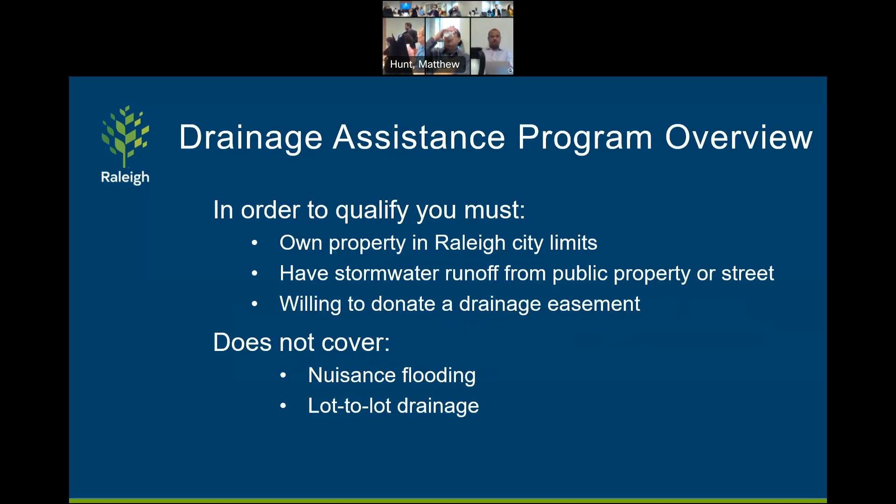On previous presentations, there was an extra bullet that would be here. It said you would have to pay the stormwater utility fee. Now that the policies have passed through council last month, that is no longer the case, so that has been removed. And the drainage assistance program does not cover nuisance flooding or lot-to-lot drainage.

So an overview of the program, we have $1.25 million in annual funding that is allotted. That doesn't mean that those funds will necessarily be spent this fiscal year. Oftentimes they're spent in future fiscal years. With that, 8 projects will be funded per year, and funding is based on the ranking. Now, keep in mind that projects can move up or down depending on how projects come in, if they're ahead of them or behind them.

So we have 2 projects. We have Mourning Dove Drive, which is the second one I'll talk about, a little bit east of Six Forks and south of 540. And then we have Bayfield Drive, which will be the first project I'll talk about. That's a little bit off Western Boulevard as you head towards Cary.

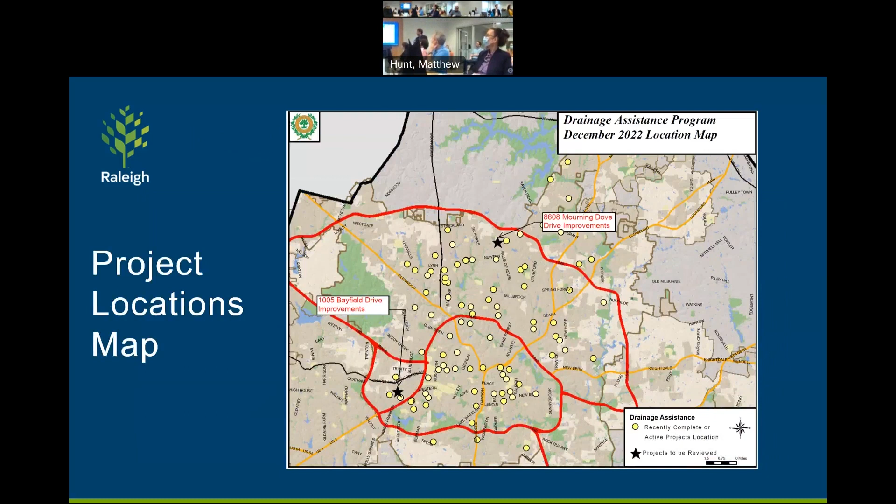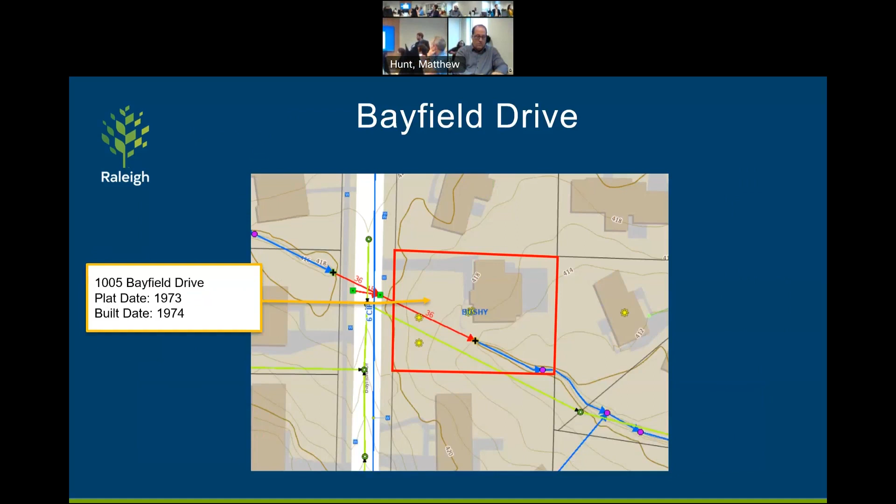So Bayfield Drive is a single lot platted 1973, built in 1974. I will give credit to the resident on this one. She has been very, very patient. This was actually the 6th project that we scored. So she has been waiting for over 6 years. And so again, credit to her for being patient and waiting through this program.

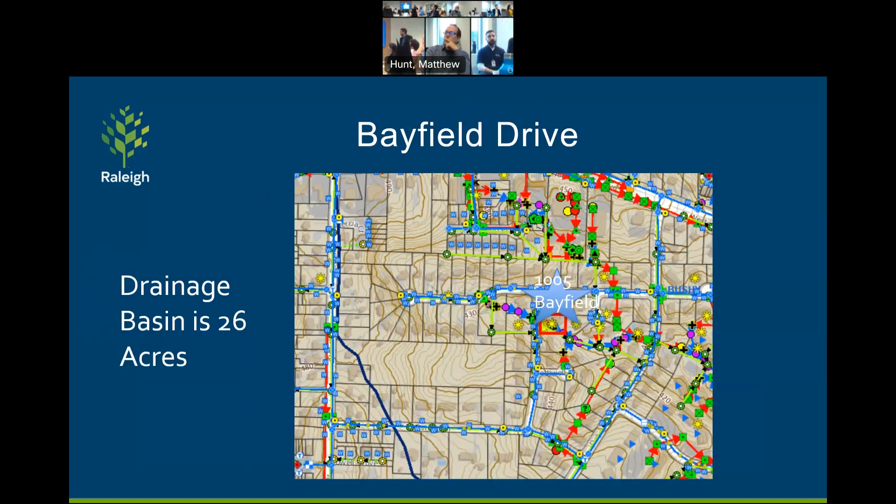Just zooming out, right here we have Western Boulevard. We have Bayfield Drive right here, and the drainage basin is 26 acres. And as you can see, there's some sinkholes all along the route of the pipe. It's within about 20 feet of the structure. The picture on the left is looking downstream. The picture on the right is looking upstream. You can see they're fairly sizable holes. She's had to cover up her property because it's a hazard, and we're trying to help mitigate that.

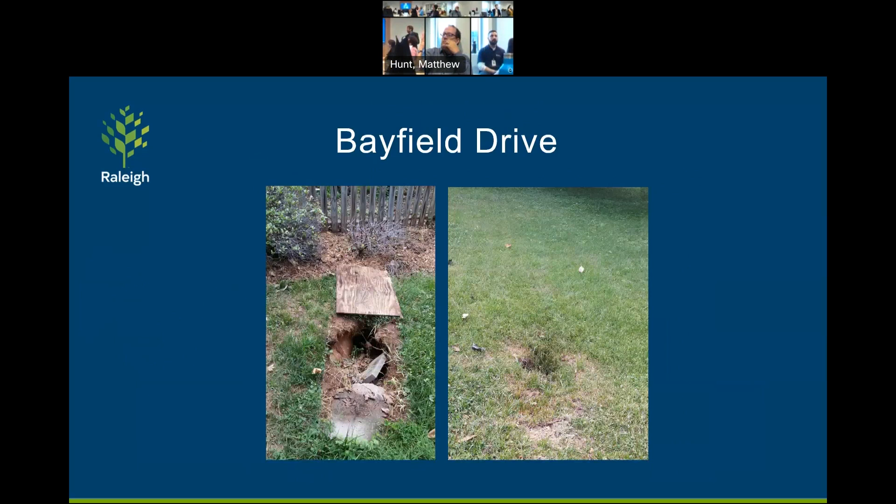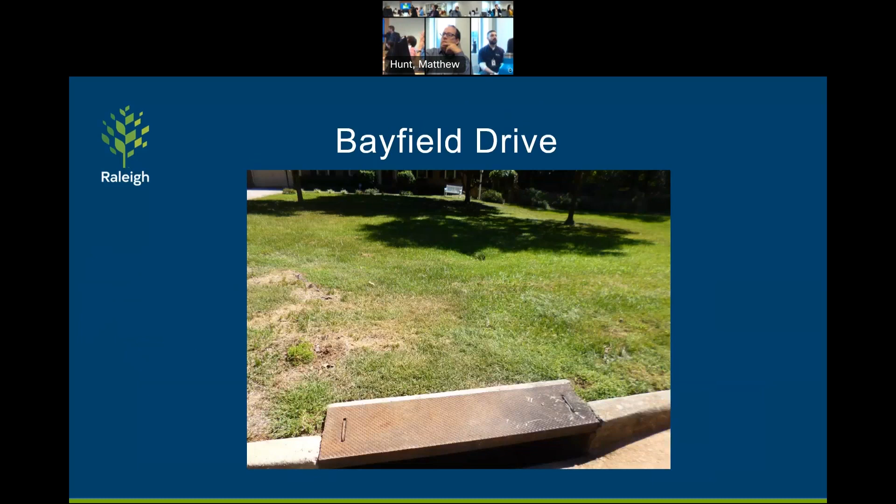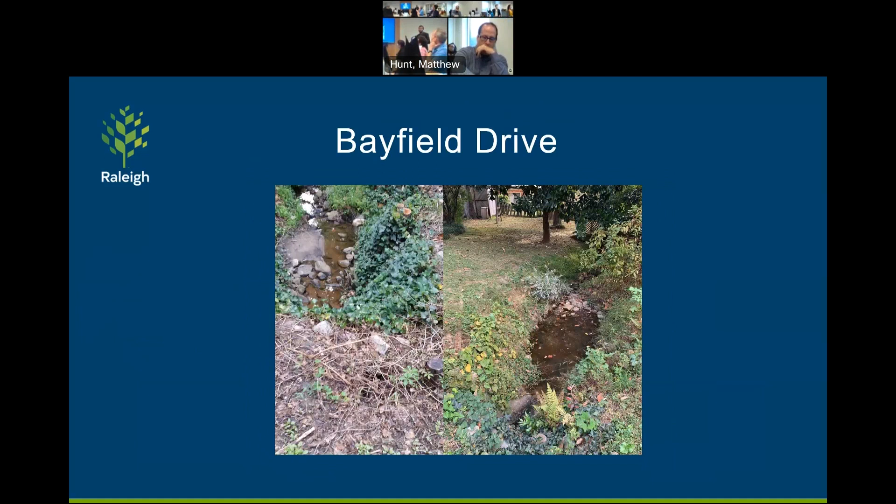This is looking down towards the house from the street. Again, you can see a hole right in this area in the middle of the screen. Towards the end, the pipe will daylight. You can see there's a little bit of erosion going on. Not exactly threatening the structure, but while we're out there, we'd like to mitigate some of the risk and do some outlet protection.

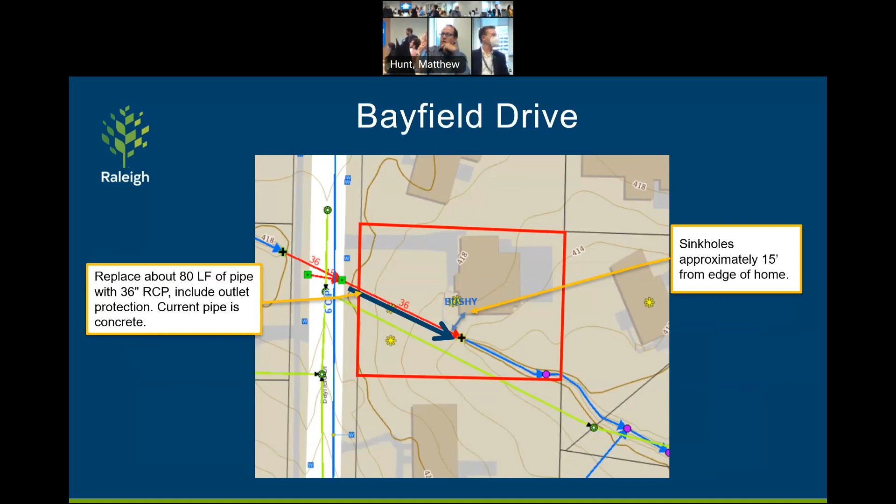And so the plan for this is replace about 80 linear feet of pipe with RCP, include some outlet protection. And we did look at perhaps lining, given the video and condition of the pipe. Don't think that's going to be an option. So we'd like to go ahead with a dig and replace of the pipe.

And the scoring, one of the things we're doing now is we're looking at past projects. I used the Bramblewood project, which I'm sure you guys remember from last month or 2 months ago. You can see the scorings are fairly close to each other, which shows the consistency of our evaluation system. So that's very good. If you recall, there were sinkholes and replacing a portion of the pipe about the same distance, and again, these scores are very close to each other.

And costs. Looking at how we arrived at the cost of $102,000. We've had several submittals regarding Western North Ridge where the contractors submitted their proposals. And what we did was we took those numbers and applied it to this project. So we're using a little bit more accurate, more recent numbers. So with that, looking at those totals, we had the 4 contractors.

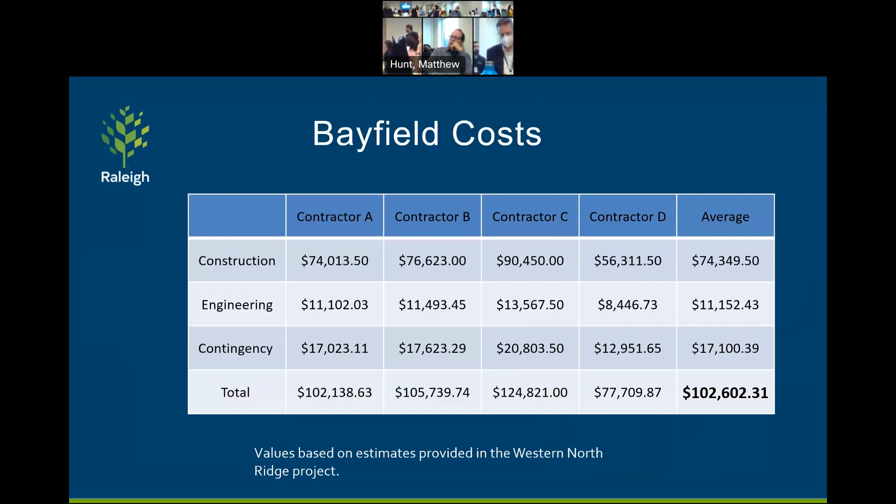So what you're seeing here is an average of the construction costs, the engineering, the contingency, which I assume would be 20%, and then the total cost. Again, this is all on average, but these are all estimates. Costs can vary as we get into the project. So we assumed about $74,000 for construction, engineering 11,000, contingency of 17,000, and total cost of 103,000. So with that, I'll stop and pause for questions, recommendations, comments.

We're good. Do you want to approve this or do you want to wait until the second? Let's see the second one. Yeah, do it in one.

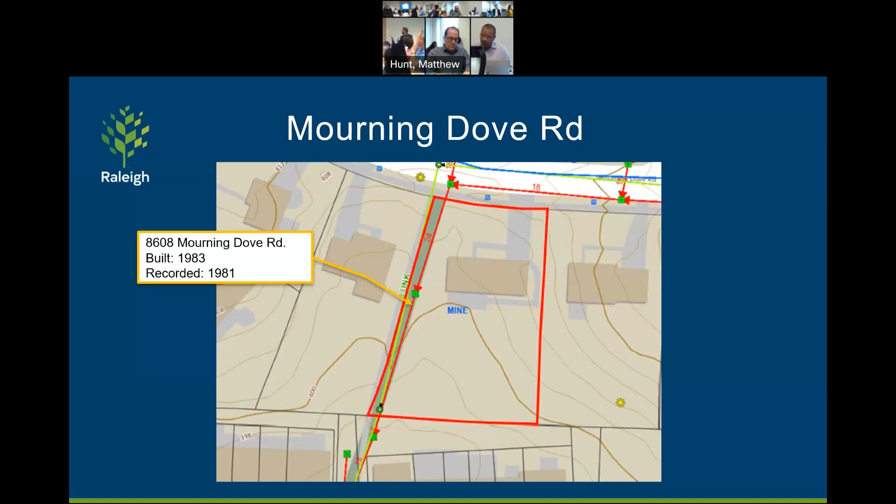So this is actually a fairly similar project. Single property. We have a couple of sinkholes that you'll see in the next slide. So again, this is just south of West Millbrook Middle School. And I'll actually get into that just a little bit because one of the things you'll notice is that the pipe compared to the previous project is smaller.

So we had a 36-inch pipe on the last project. We had 24-inch pipe on this project. But the West Millbrook School development did put in detention for the 100-year storm. So that's why I believe we're not seeing any structural flooding issues at this moment. So we're just seeing sinkholes.

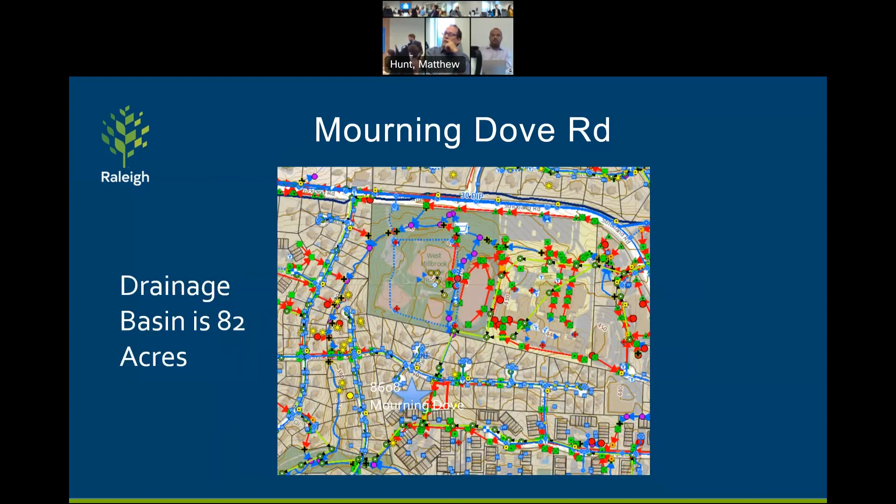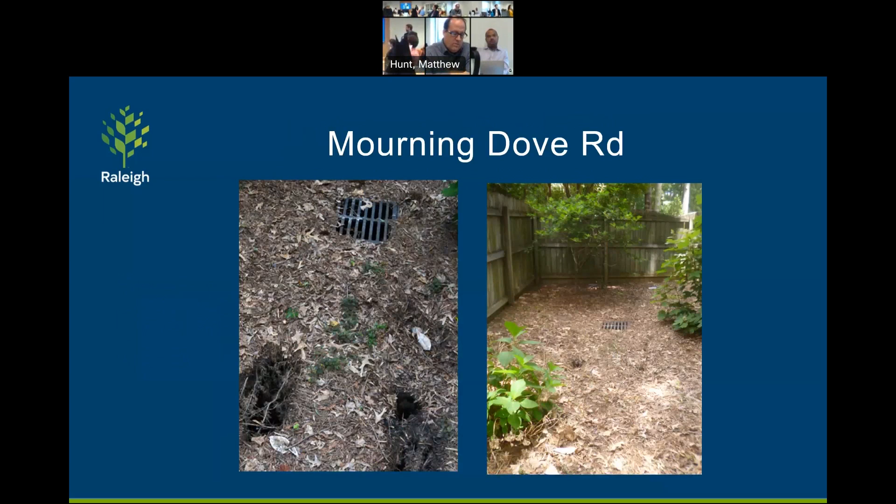So I've got two slides here. This picture was from 2017. This is the inlet or the catch basin on the westernmost portion of the project. That was from 2017. This is 2020. So you can see the difference in how it's grown.

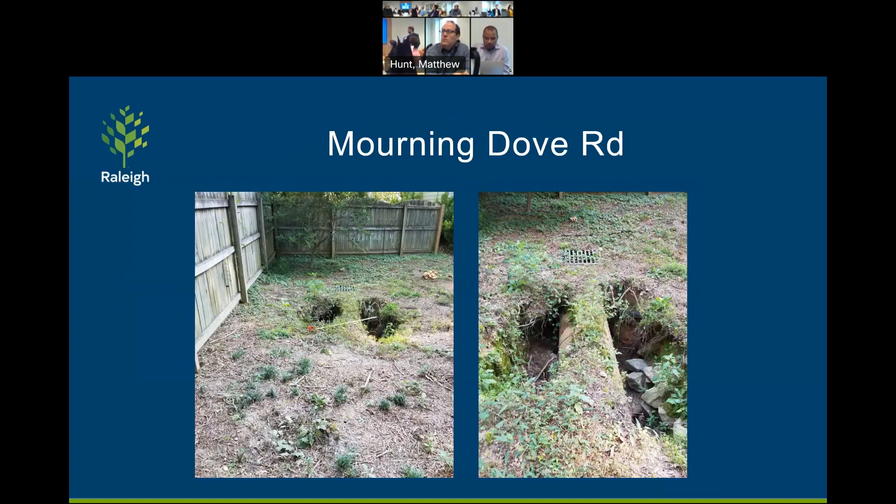We think that the best option for this one, again, is dig and replace. We would install an outlet right here at the property line, even though the line does go a little bit south. These property owners to the south have been amenable. They've been open to projects, but they have not signed our request form. So we've just stopped short of the property line. Again, the majority of this action is going on near the blue line.

Comparing scoring, again, going back to Bramblewood, very similar to each other. I'm sure if I added a third column with Bayfield, they would be quite similar as well. But again, it shows you the consistency of the scoring. So I'm very impressed with the team and their consistent scoring as well.

Looking at the cost, again, same metric. Looking at Western North Ridge, average cost for construction $87,000, engineering $13,000, contingency $20,000, total cost $121,000. You'll notice this is about $20,000 more than the previous project. There's sewer line in the area, so I accounted for that extra work navigating around the sewer line, which is a little bit longer. Also adding a catch basin.

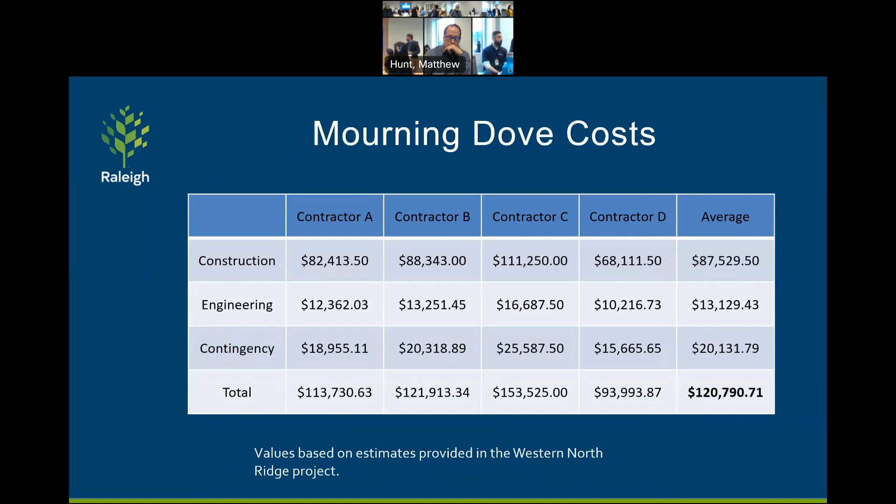So total project costs, we're estimating Bayfield 103,000, Mourning Dove 121,000, total 224,000, which would leave us 718,000 left. With that, I'll stop for questions, comments. The contractors, A, B, C, D, are they the same for both? Yes. Okay. All right.

And just in general for everyone, in terms of these diagrams, the red lines are always closed conduit, underground pipes. The blue lines are always open channel pipes. The green lines are sanitary sewer pipes. That's the schematic that we use, consistent with IMAPS. So that same legend is used to help you get your bearings. And I probably confused things by adding a blue line here. I thought of yellow, but that's yellow and that's orange, so. That's fair. It was a quick slide. Thank you for clarifying, both of you.

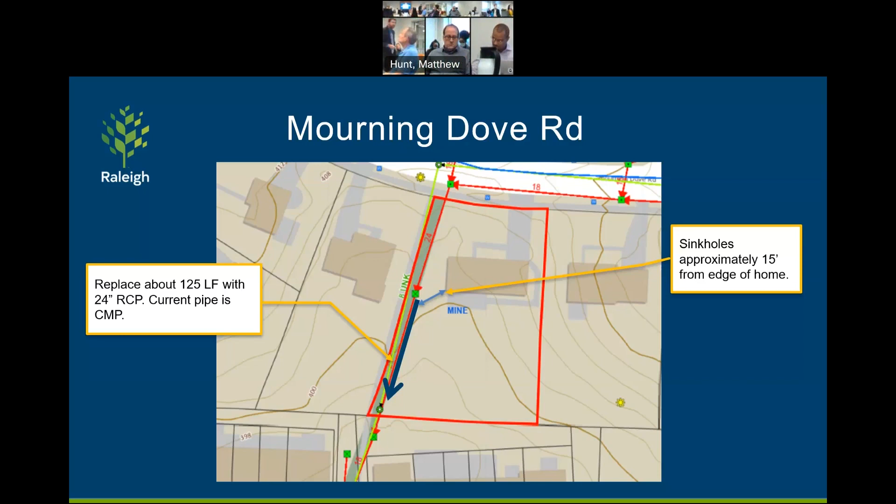Barbara? Around to the other side.

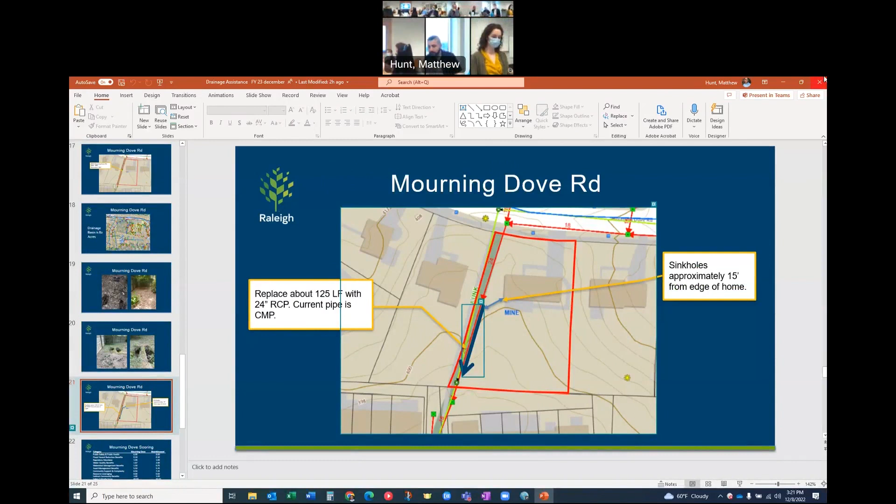Hi. Well, thank you, everybody. We're really pleased to have this opportunity to get some feedback on our public engagement plan for the Pigeon House watershed. When we last met in October, we did an overview of the watershed planning program, if you recall. We touched on public engagement, H&H modeling, water quality modeling, asset management, all the stuff that we do in watershed planning. And this presentation is a deep dive into public engagement. We'd really like your feedback.

And I'd like to give a shout out to Ellen Colon, who's here from our Office of Community Engagement. Thank you very much for coming. Ellen has been graciously reviewing our plan. She came to our first Pigeon House meeting and she's here to hear your feedback firsthand. So Ellen's the expert and we're just up here presenting. So please don't hold back on feedback. That's why we're here. Thank you.

All right, so the Pigeon House Branch watershed is located right in downtown Raleigh. We have Oberlin Road, the boundary on the western side. Whitaker Mill Road is the boundary in the north. And Hillsborough Street's the boundary on the southern side, with the Capital Boulevard corridor going through the basin. So do we have any SMAC members who live in Pigeon House? All right, we have our stakeholder.

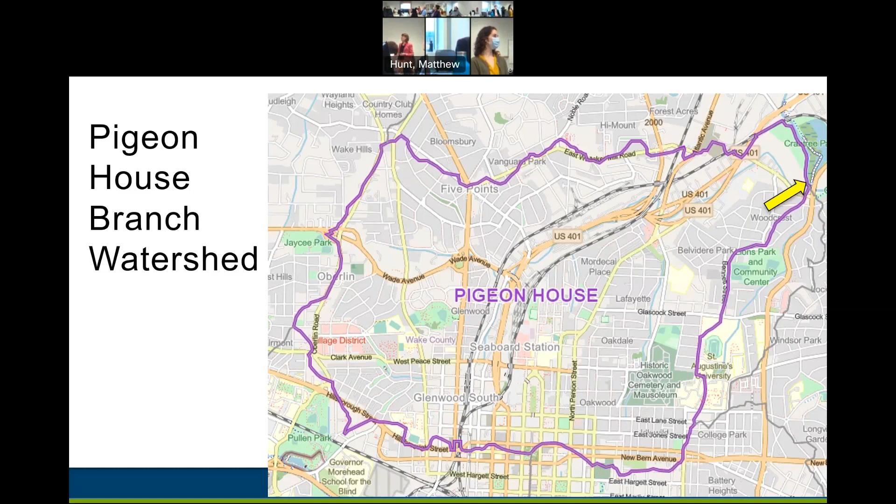All right, and last time we talked a little bit about why public engagement is so important for watershed planning. We talked about how we're using these plans to figure out where to invest millions of capital dollars. We want to hear from the community on what their stormwater issues are and what's important to them.

Last time we did touch on the critical success factors for our watershed planning program. So we said, if we do these things, our plans will be successful. And we had a success factor to build trust with the community through equitable engagement, awareness, and education. And if we can do that well, we will better accomplish that first factor, which was to understand the level of service needs and expectations of the community.

All right, so we have the public engagement plan in your packet, and we will go through all the components of the plan. Like I said, we did ask for feedback from Ellen and from the Department of Equity and Inclusion. So they gave us some valuable feedback on messaging and things like bring the meeting to the people instead of the other way around. So we were happy to hear that and are looking forward to incorporating that. We're still in the early stages of that public engagement.

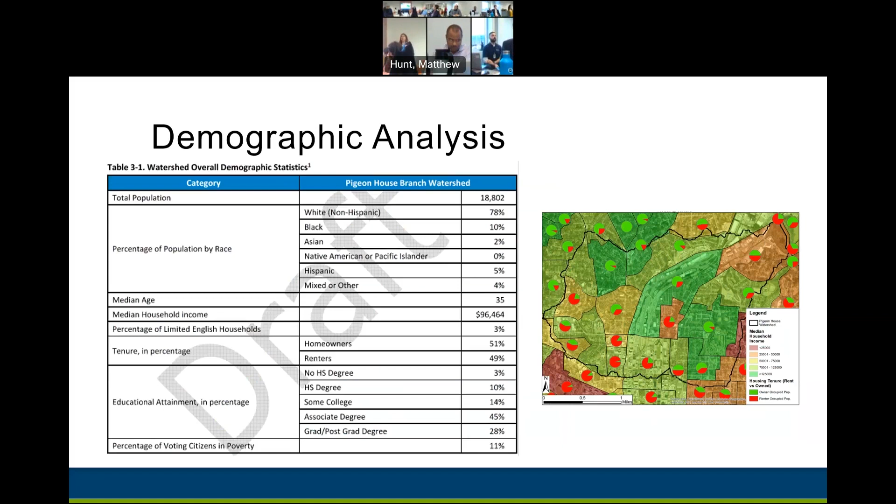So the map here, you can kind of see the outline of Pigeon House. These are all the census block groups within Pigeon House. So this data, we've broken these categories down into the block groups. So this data will help us understand more about where and how to target our engagement with different populations.

Involve and collaborate, those allow stakeholders more say in the decision-making process. And then empower is basically delegating the final decision to the stakeholders.

So here we're in our early stages of the watershed study, and our main stakeholders that we're dealing with right now are the general public and community groups, and the level at which we're engaging them is inform and consult. As we develop projects out of the watershed studies, we may involve those groups more. We may be doing some collaboration later in the project or in later phases as we develop projects with city agencies and government agencies.

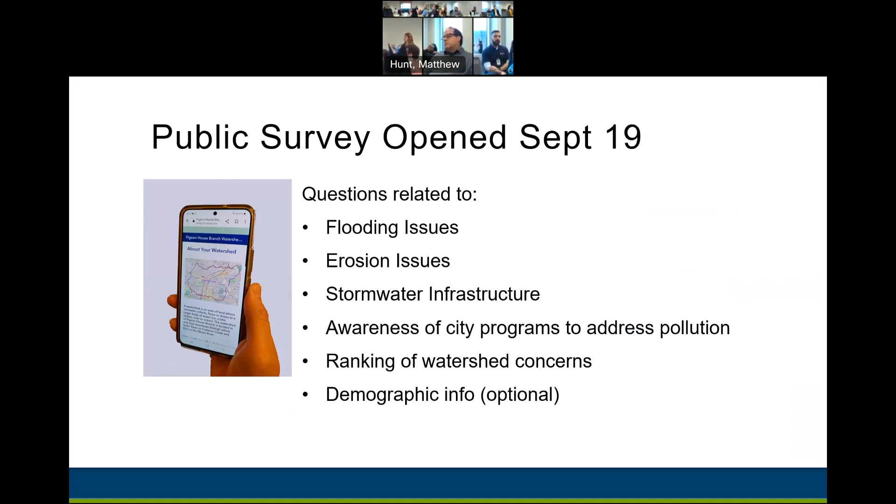So since this watershed study, as Barbara mentioned, is going to be determining our priorities of where we put our capital funds in this watershed, it's important for us to hear back from the community in the watershed about issues and opportunities for improvement. So we've asked questions related to flooding, erosion, infrastructure, pollution, and we also asked some demographic information, which I'll talk a little bit about later.

And then we had our public meeting. That was in early November, and we held this at the Halifax Community Center, which is located pretty much smack dab right in the middle of Pigeon House Branch watershed.

And that was from 4 to 7 in the evening. And in keeping with our big goals to promote stormwater programs and stormwater messages, we are setting these meetings up as kind of a drop-in open house style. So we have a number of tables here representing different stormwater programs. So at Watershed Planning, folks could learn about the study. We had lots of big poster maps and also some computer screens where we could zoom in and talk with folks about specific issues in the watershed.

We had a stormwater maintenance table where we even brought in a pole camera to show folks how we do stormwater inspections. The drainage assistance and stream stabilization teams, Chaz and Dominic, were represented. They had a table there. Raleigh Rainwater Rewards, we had a really nice poster showing the location of all of those projects. And there have been 49 of them approved in Pigeon House of all different types. So it's a good example for folks to learn about that program. Also highlighted volunteer opportunities and our green stormwater infrastructure initiatives.

So we had in total about 15 staff at this meeting, as well as a few staff from our consultant that's helping us with this study. So it was a really good opportunity to get a lot of engagement with the folks that came to the meeting. A lot of one-on-one time.

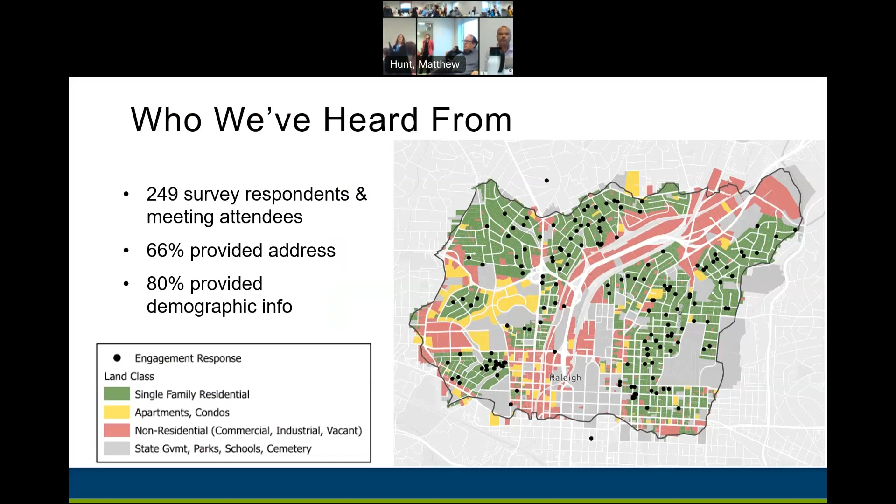So if you see the black dots, we've got a good geographic spread of responses across the single family residential community. Where we've gotten a little less engagement is with the apartments and condos. So that's the yellow areas. Traditionally, those have been difficult for us to reach. We don't have their contact information through our billing database like we do with some of the single family residents. So that's something we've been talking with housing and neighborhoods, community engagement, trying to get some ideas about how to really reach out to the demographics that we're missing and the areas that we're missing.

For housing tenure, the watershed is almost 50-50 homeowners and renters. But we're seeing most of our response coming from those homeowners. So I think that corresponds pretty well with what we've seen on the previous slide, where we're missing some of those apartments and condos. So that's an area where we'll be focusing outreach.

Okay, so that was kind of who we heard from. We'll talk about what we've heard. We had a ranked choice question on the survey that said, please rank your concerns in the watershed. So the highest ranking was street flooding, followed pretty closely by pollution. Yard and home flooding and aging infrastructure and erosion followed that in order.

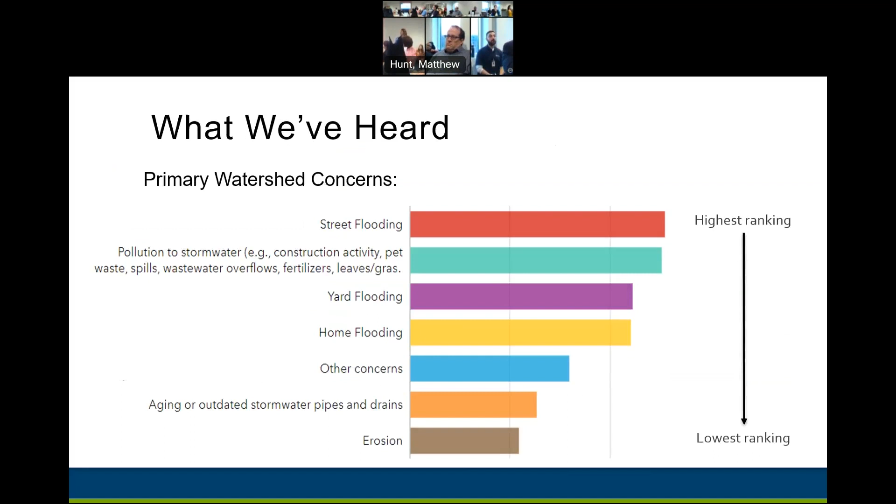And this is important information for us as we move forward, knowing where to target our modeling in the next phase of the watershed study, and also helping us to verify those models to particular storms. So, in most cases, folks provided their information. We can follow up if we need more information about their particular flooding issues.

Did I get out of that?

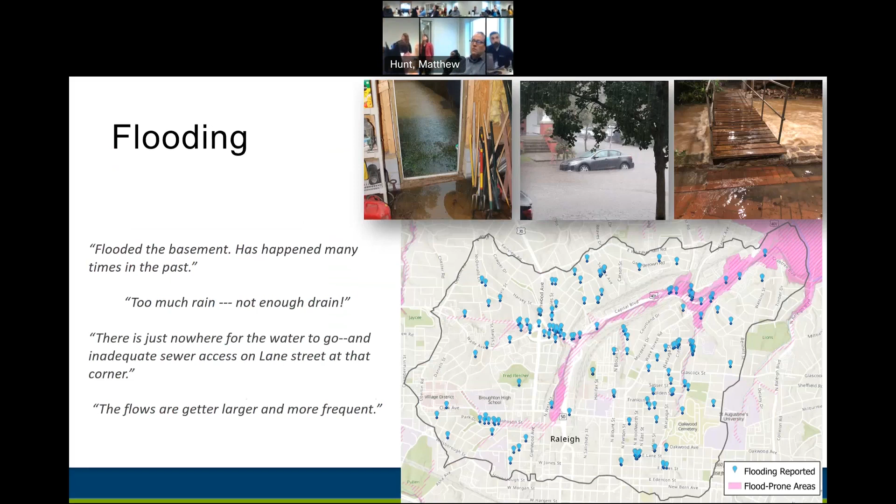Okay, so the second highest ranked issue that we saw was pollution. And the question we asked here was phrased to gauge and promote awareness of the existing programs that the city has aimed at pollution prevention. So we said, please, if you are aware of any of these programs, please check.

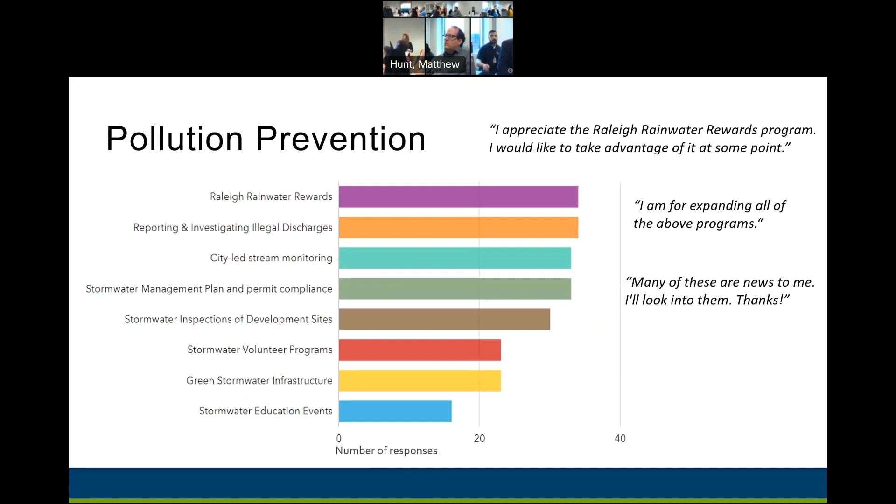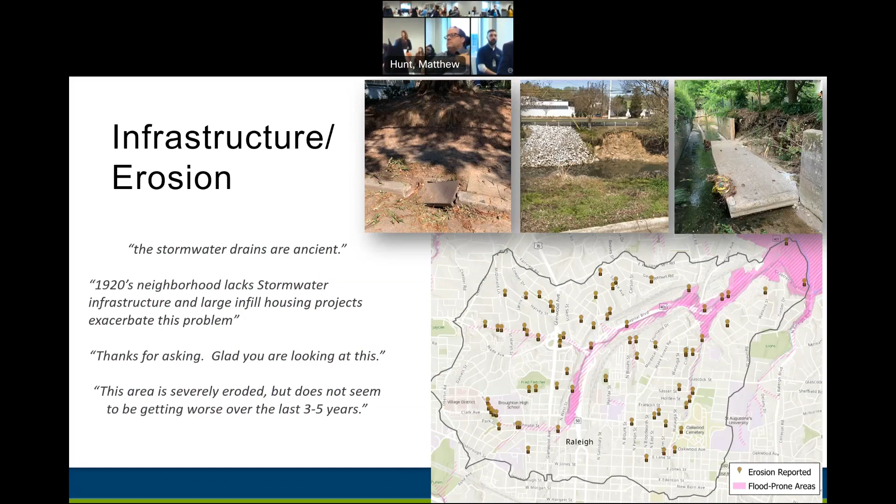All right, so that kind of gives you a quick overview summary of where we're at to date. This is certainly not where we stop. It's where we will be continuing. We're in this first phase of the project, and engagement's going to continue throughout the project. So some of our future things to look at here: efforts to target some of those demographics that we haven't gotten as good a response from. Again, working with housing and neighborhoods, community engagement, folks like Ellen to help us with that.

And we plan on having at least one more public meeting for information gathering purposes. That would probably be early in the new year to try and get a wider audience of that group. We'll have at least 2 more public meetings during the future phases of the project, one after we have some initial results, and one as we're kind of wrapping up the project. And ongoing education. So this ties in with our goals to promote stormwater programs and to promote stewardship of the watershed.

And then last, I wanted to mention, we'll be coordinating with a separate stormwater project that's just kicking off and looking to address the total maximum daily load in Pigeon House Branch. And the proposal there is to develop a watershed action plan. So there will be lots of community engagement involved with that, and that'll span over the long term. So that'll continue after our watershed study's done. So we're going to be coordinating with that effort as well.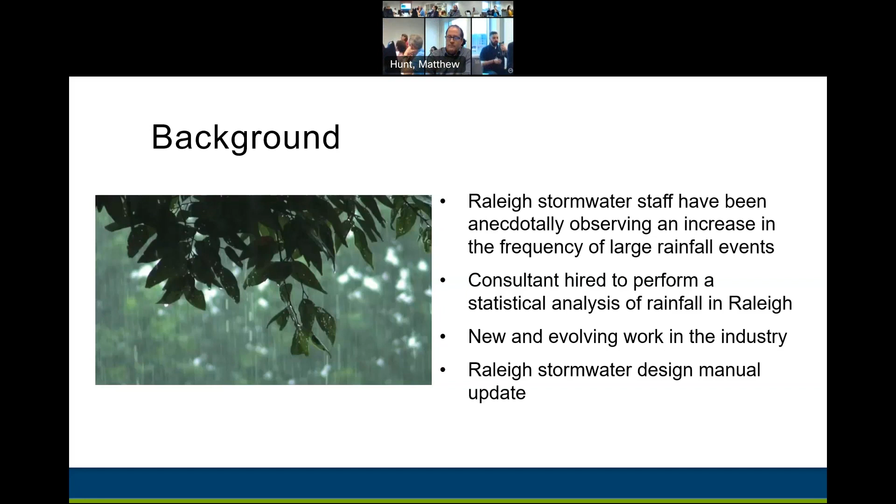So next background slide, just want to spend a minute talking about what is currently in the stormwater design manual. And Sally's here to keep me on track. So the design manual has precipitation frequency estimates that were developed in 2002 based on the available technical resources at the time with input from Dr. Malcom at NC State. And the technical resources available at the time were Hydro 35 and TP 40, so older rain atlases developed in the 60s and 70s.

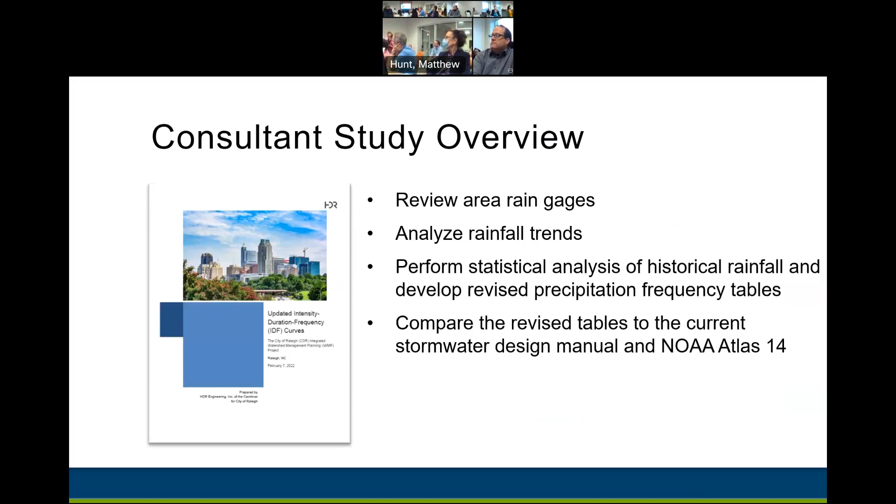All right, so brief agenda, we're going to give an overview of the consultant study and the results. We'll talk about some of the ongoing related work in the industry, and then Sally's going to talk about the impact of all that on the design manual. Okay, so we started this study in 2021, and it was a high-level study with 4 main tasks. Review of the area rainfall gauges, then looking at trends in that data, then performing a statistical analysis of historical rainfall, and developing a revised set of tables. And then we compared these tables from the study back to the design manual and back to NOAA Atlas 14 to see what the impact was.

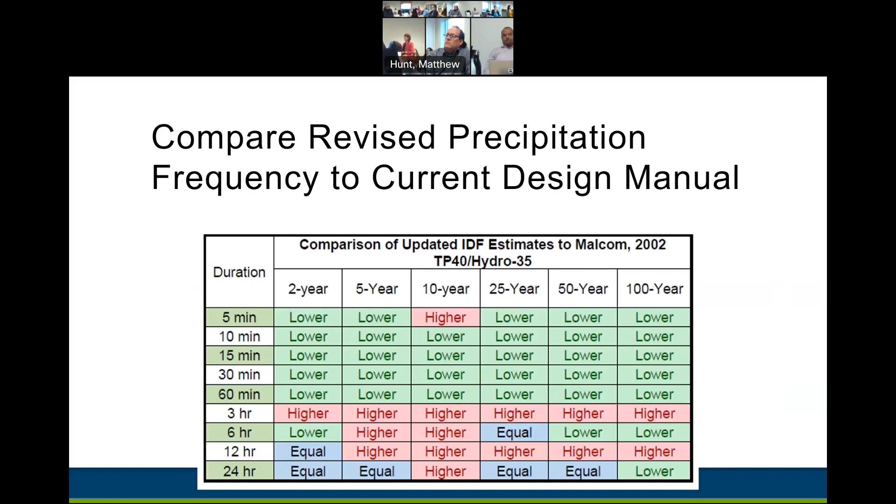All right, so that was this high-level study that we did with these results. And now we can talk a little bit about what's going on in the industry. And then Sally will conclude with what's going to happen in the design manual. All right, so there will be a NOAA Atlas 14 update.

This study was not completely funded at the time when we had our consultant study going on, but now it's completely funded and moving ahead. And they will be updating the precipitation frequency estimates for the mid-Atlantic states. And their prediction is that with the increase in number of stations and the length of record available, this will have a considerable impact on the frequency estimates. So this study is funded by the states, the Departments of Transportation in the states.

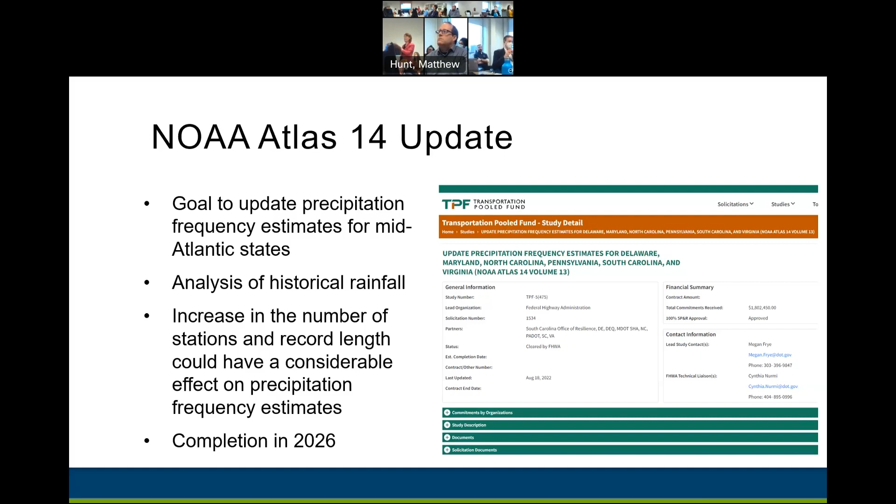That's one. And then there's the NOAA Atlas 15 update. This study was funded by a congressional bill that passed in May of this year, and it is a precipitation frequency analysis for the entire US. They're thinking it's going to be published in 2 volumes. The first volume would look at historical trends and observations, and the second volume would look at future climate projections.

So what kind of safety factors could you apply to that first volume to account for climate change in the future? I don't have a completion date for this one yet. They're currently soliciting comments on the approach. So you may be wondering, how can you have a NOAA Atlas 14 update going on at the same time as the NOAA Atlas 15 update? That's a good question. I think a lot of people have that same question.

But there's a lot going on in the industry. There's a lot of research. For example, NOAA has a project with University of Illinois and University of Wisconsin-Madison to do the research for NOAA Atlas 15. There's a project locally with NC Department of Transportation and NC State looking at future design storms. Arizona State University has another project looking at safety factors similar to what Chaz looked at in his analysis.

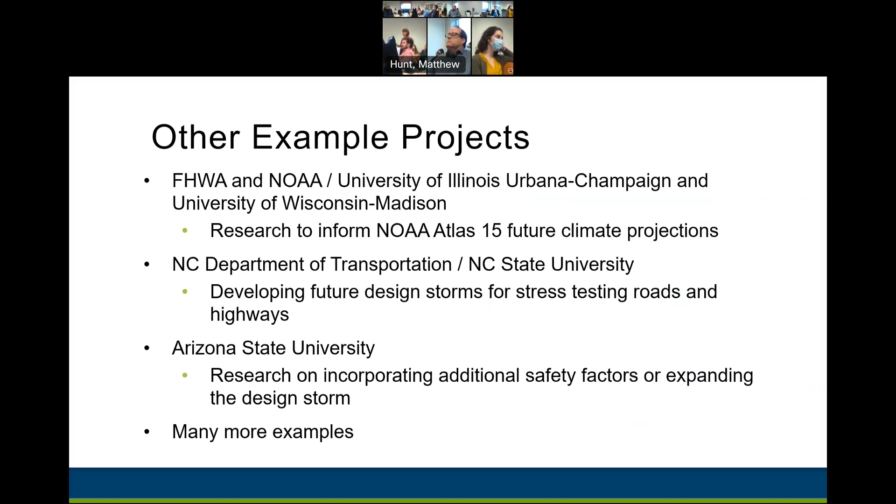And there's a lot more examples. Charlotte Water, I know, is partnering with Colorado State University and doing some research in this area. So there's a lot going on. The question is, well, what does this mean for the design manual? Yeah, thanks, Barbara.

We want this design manual update to last a long time. So we are not going to put hard numbers for rainfall into the design manual itself, because it's adopted by reference into the UDO, so it has to be approved by city council. That's a lot of steps to go through to make any changes. So what we are proposing to do is to reference a document on our website that will say, as of this date, we use this rainfall method or resource.

We haven't made a decision about the initial rainfall rates. Currently, we see most people using Atlas 14. We could require the existing design manual table. I will say, Atlas 14 has a lot more heft behind it in terms of peer review and being established in the water resources industry.

I wanted to mention there are several ways that people are accounting for changing rainfall rates. One of those is updating the rainfall rates. Another way is to up the design storm that you require things to be designed for. And that's something that we are doing with this revision to the design manual, for inlet design and gutter spread calculations. So basically how much water can sit on the road and how fast water has to get into the inlets.

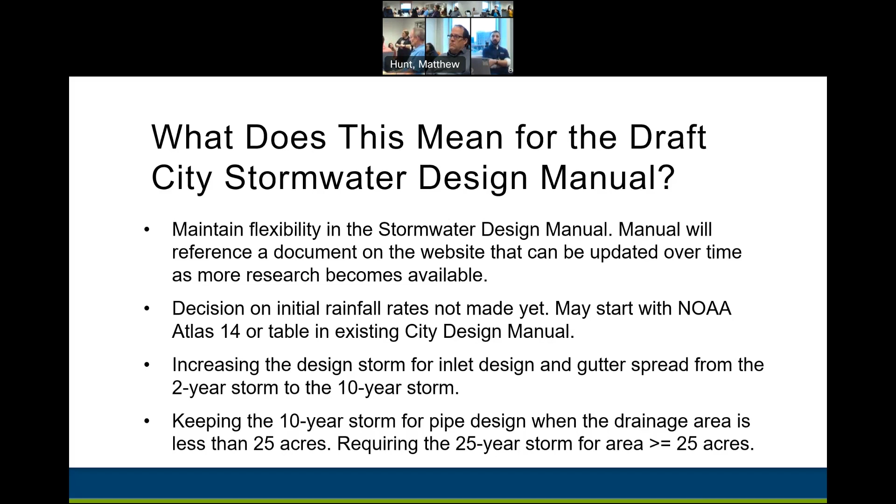Any other questions? Feedback? How will you get the updated rainfall chart that you're gonna use? Do you have to get city council to approve that? No, my understanding is we can incorporate it by reference. We can refer to outside technical resources. But you could change that without having to go through council? That's our understanding.

I just want to say I commend it. I appreciate especially the upping of design standards going forward. We can chase the rainfall, but we can get the results quickly with the standard increase. So I appreciate that.

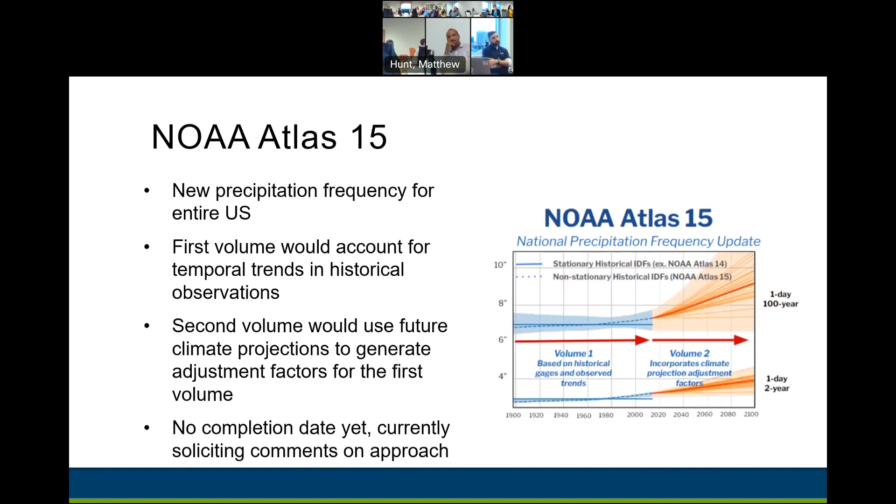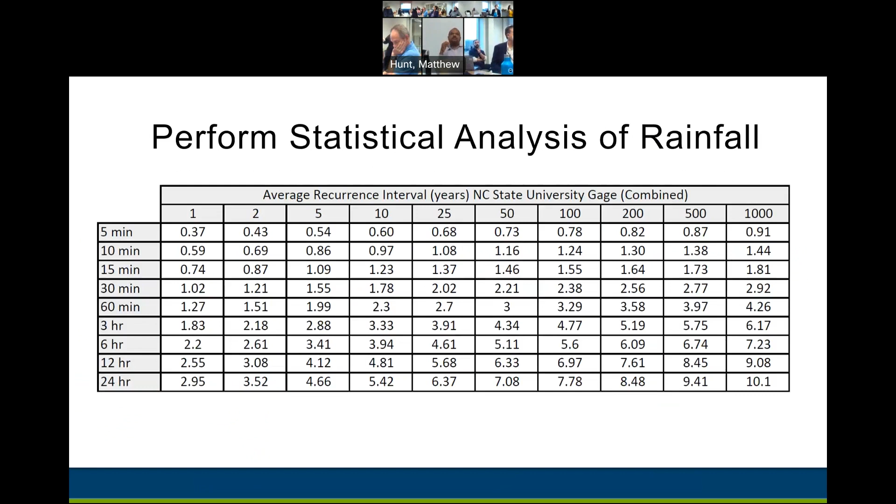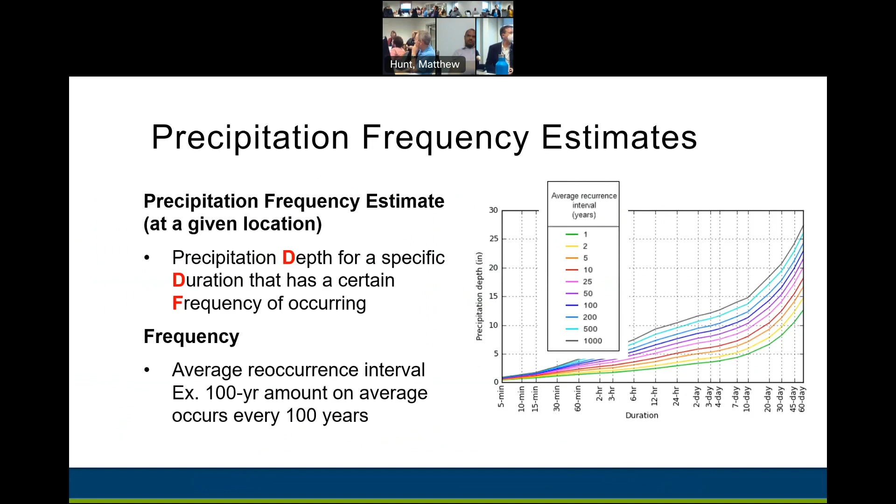One of your graphs showed 10 inches of rain increase in 70 years, from 1948 to 2020, 40 to 50. How does that compare with other areas of the state or country? Or can you get that amount of detail? This is near the beginning, your second slide. That was from the NOAA Atlas 14 website. Keep advancing, the bar and line. That linear plot with the trend line. There you go.

So this is historic rainfall rates at that combined station. You can see one year you have a drought year, one year you have an excess rain year, but the trend goes up. I was asking, does the southeast or the west look like this? That's a good question. I don't know the answer to that. The data is publicly available, but this study only looked at Raleigh. I think that'll be an interesting result from the NOAA Atlas 15 effort, to see how it's looking in different parts of the country.

From a layperson's perspective, 10 inches in 70 years just feels like a lot. So I'm curious, regionally, are we special? Well, I've seen a presentation at a conference by one of the folks at NOAA, and there are increasing trends in rainfall amount and in intensity per hour, and they can show that on multiple stations throughout the country. Urbanization has a lot to do with it. Because this area is so rapidly developing, you might be seeing a higher increase than more rural areas of North Carolina, but there is an increase overall.

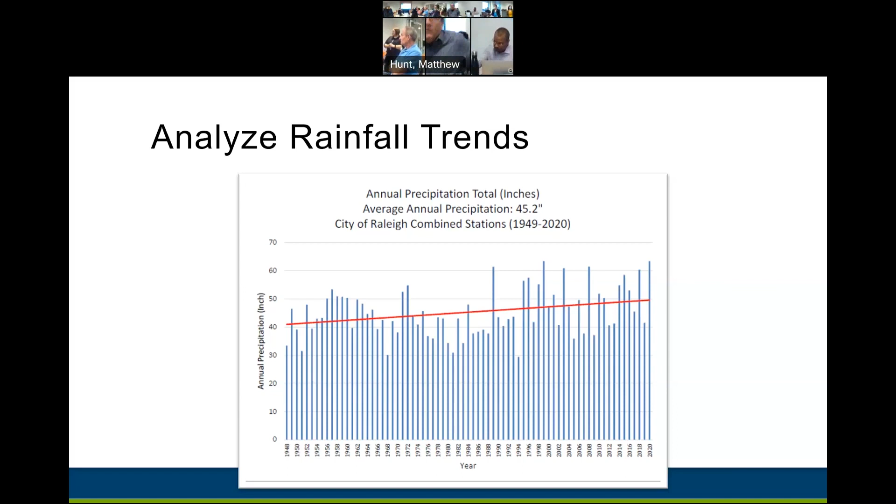Anything else? Thank you. All right. Sally and Heather. And 14 minutes early, let's keep it going. Time for the tour, right? Exactly. Thank you.

Last presentation before our exciting GSI tour, so thanks for hanging in there. We're gonna have a quick GSI plan update: where we've been, what we've done so far, and where we're going with our GSI action plan. Quick background: in summer 2019, council referred the task to SMAC to prepare a plan for the city to continue advancing the use of GSI. SMAC formed a GSI committee and, with city staff support, developed a plan presented to council and the Growth and Natural Resources Committee in June 2021. A month later, council accepted and endorsed the GSI plan.

What's not on the slide is that Kevin Boyer presented a year ago in December to SMAC, so Sally and I thought now would be a good time to give an update a year later. Since then, Kevin Boyer has retired, and I was promoted. Yes, he is here.

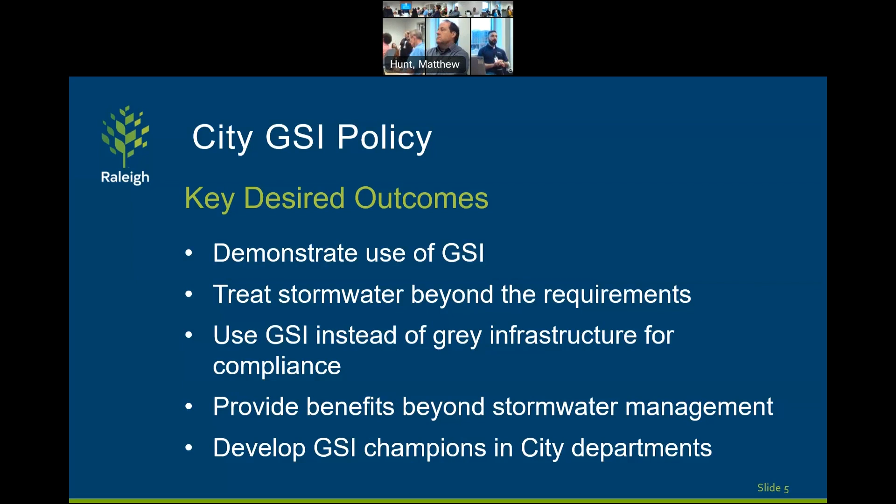And then we're also looking to develop GSI champions within city departments. So we're already on our way to this, but continuing to coordinate with and educate and bring people from those coordinating departments into the fold. And I'll talk about them in a minute. So the basic process of how this works is we'll do a really initial screening during the conceptual design. We're only going to be looking at projects that have land disturbance. So if it's a building interior project, we're not going to be involved in it.

We're going to focus on projects with bigger budgets, figuring that those are the ones that can afford to have some additional scope added to them. We've heard some concerns: hey, if I've got a $100,000 sidewalk project and you want to add $50,000 worth of GSI, you've had a big impact on my project. And then there's going to be detailed evaluations during design. Kendall and I are going to be resources to those teams to help. We both have experience evaluating things for GSI, so we'll work with those teams.

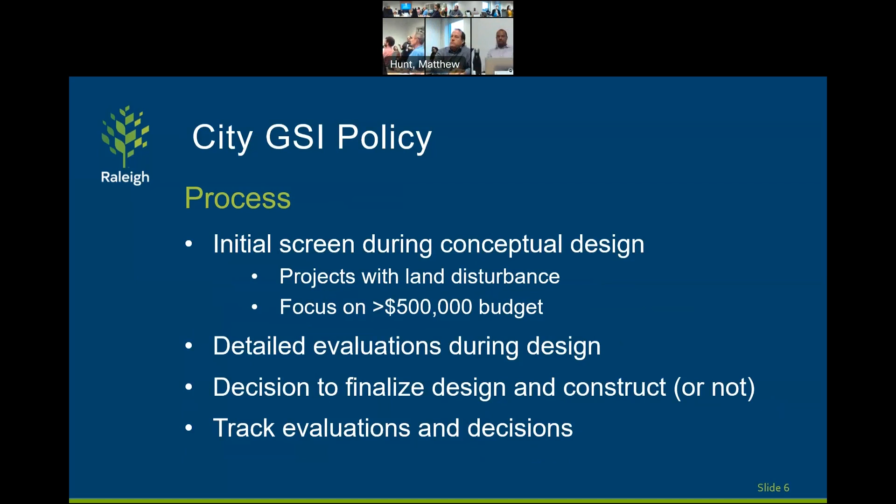And then early in the design process, we'll make a go, no-go decision of, are there the resources to continue to finalize this design and implement it as part of the construction. And Heather's going to be part of those conversations from a funding standpoint and a prioritization standpoint as well. And so we're hoping to see many of them go forward. We're requiring all of them to evaluate it. And then we're going to track those evaluations and those decisions and hopefully learn some things about, if GSI isn't being implemented, why not?

And in terms of implementing this policy over the past year, the stormwater staff has met with the folks who lead CIP projects. So Parks and Rec, roadway design and construction, and transportation. We're about to meet with water, and we've met with the construction management folks who do the vertical projects and all the building projects. And we're also coordinating with the city's strategic plan initiative, so this is part of the strategic plan. And so one of the next steps is we've formatted an administrative policy the way administrative policies should look. It just needs a signature by the city manager. And we're moving forward with the policy becoming effective for fiscal year 24, which would start July 1st, 2023.

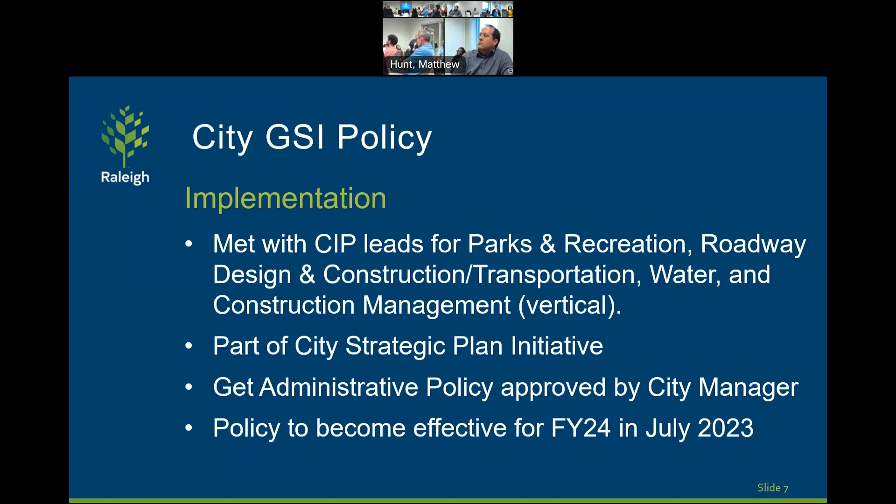Thanks, Sally. So moving to GSI project identification. As Sally mentioned, this GSI policy would require GSI evaluation for many projects. So what we're trying to do is reach out to our different internal departments, getting lists of their priorities in fiscal year 24, their CIP project lists, and seeing how many of these we think will include GSI evaluation and potentially GSI. That way, hopefully we can begin to plan our budgets to support as many of those as we possibly can, and also work with our partners to see if there are other funding opportunities for them to take advantage of so they can also include GSI.

Just want to thank Barbara and Sherry, because through their watershed planning effort, you saw GSI is specifically included as a tool for addressing water quality concerns. And so we really appreciate that strategic look at where we can best fit GSI within the watersheds themselves. And then also, like Sally mentioned, not all of these city-led projects are going to fall within this evaluation requirement. And so our team is still working internally and externally with partners to identify opportunities for GSI retrofits.

One example would be traffic calming. A lot of times that doesn't disturb a lot of land. They might be low-cost solutions that they're looking to implement quickly. But what we're trying to work with them on is, hey, can you save enough space that we can retrofit a bioretention bump-out later? So right now our consultant support is helping us look at the next priority locations for traffic calming, so we can early in design think about how much room we might need for these traffic calming devices, so we can come back in and retrofit multiple traffic calming options for GSI in a cost-effective way.

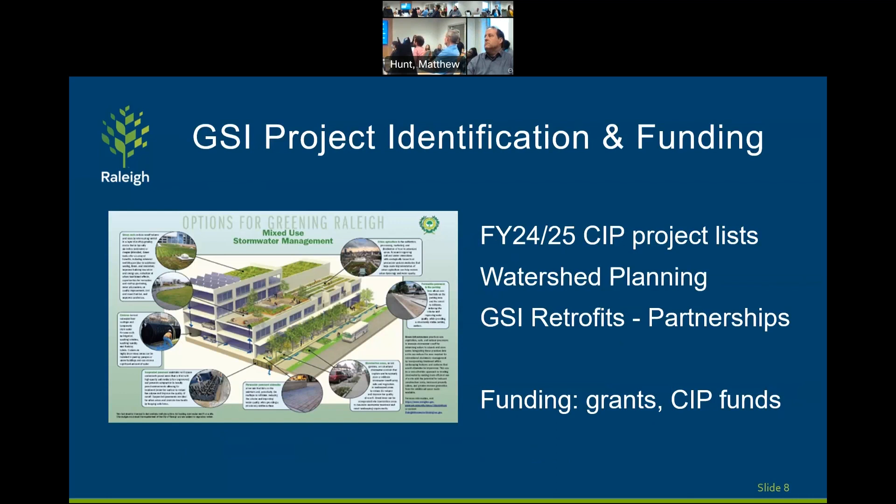We are currently writing a grant to the North Carolina Land and Water Fund for $1 million for Smoky Hollow Park. We have gotten grants from the Division of Water Resources for our subsurface gravel wetland. And with our partnership with the Water Resources Research Institute of North Carolina State University, they are bringing over $225,000 from environmental enhancement grants and 319 grants. So we are really supplementing our CIP funding with grant funds as well, which I think is a wonderful way to build partnerships and also make the most of our taxpayer funds.

So I wanted to just note that even before this GSI evaluation is in play, these are already projects that include GSI that are in design right now. And that is thanks to some of our past leadership building these relationships, some of our current staff working with staff in other departments to make sure that GSI is considered. What I find really promising about this list, which is going to grow, is that a lot of these are highly visible projects. You see East Civic Tower, Gibson Plaza. Those are projects, by the way, that we are contributing up to $1.5 million of stormwater funds to support GSI in. But it's not just stormwater-led projects.

You see construction management projects that have GSI. We have transportation or roadway design and construction projects that have GSI, park-led projects, transit. So we are really finding that we have champions throughout the city now that are including GSI projects, and that's what we want. So a very promising, diverse group of projects that will have GSI.

I wanted to talk about our partnership a little bit more at Biltmore Hills Park because it is a unique one. We are partnering with WRRI of NC State University. And one thing I really like, not only the grants we leverage, the partnerships and their staff support, but they actually have the capacity to build a stewardship crew with community members. And those stewardship crew members are actually trying to get their neighbors out to Biltmore Hills Park to engage with our staff, engage with the park itself.

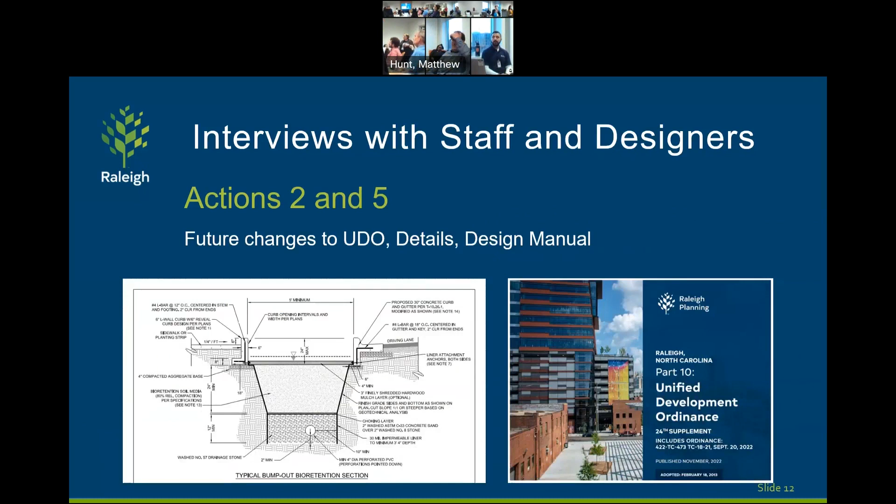So in terms of that, there's action items 2 and 5, where we're looking at incentives for private developers: what we've done in the past and what we need to do in the future to our design resources in terms of the UDO, the design details, and the design manual. So we have interviewed a number of different staff groups, both in stormwater and outside of stormwater, as well as some designers in private practice. And we got some feedback in terms of what was working and what wasn't with the GSI incentives we've implemented in the past. So one thing that's working is that we have demonstration retrofits that Heather's talked about.

Something that's working is the GSI compliance in city projects, like those roadway projects, that list that Heather shared. We have eliminated some UDO barriers. So one example of this is that you can now put a stormwater control measure that is considered GSI into your outdoor amenity space in your development.

There's a portion of that that has to be pedestrian friendly, but there's a portion of it that can be landscaping. And so in that landscaping portion, it can be a stormwater treatment. And then we have been working with this group and with council to get folks knowledgeable and engaged.

Some things that need to change. We heard a number of specific things about there being a lack of clarity around the requirements for GSI compliance. So for example, one thing that came up is whether GSI means exactly the same thing as low impact development. And we could probably talk for hours about that. But in terms of our overall program, we're using them synonymously.

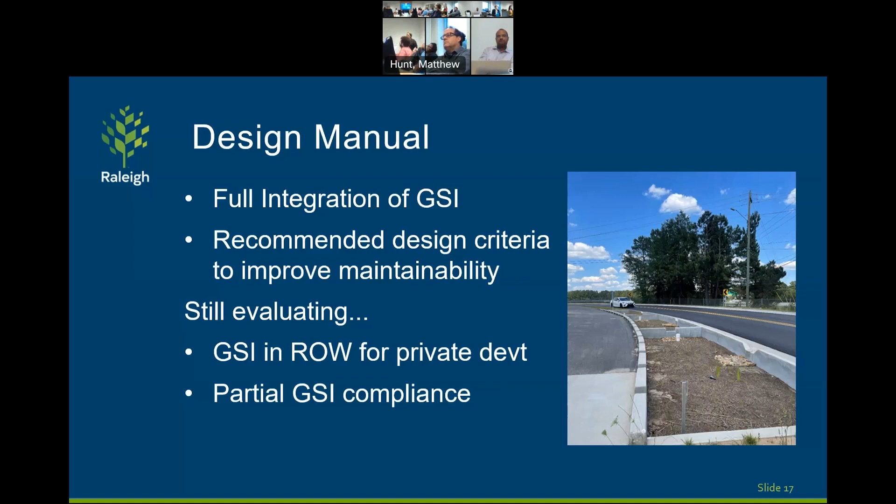In terms of that rezoning condition action, we've talked to the planning department and we've heard how this can work. So we are going to write up a list of example rezoning conditions that would address both GSI and runoff rate control or flooding issues. And we're going to bring those to this group at a future meeting.

And basically what we heard from the planning department was how other departments have worked this: as staff, we can't say, here's the zoning condition you should use, but we want to get those out into the public domain so that they're suggestions. And they suggested that if SMAC considers those, and I'm losing the right words in terms of the process, but basically if they're part of your process and your documentation, then we can refer people to those public documents in the future.

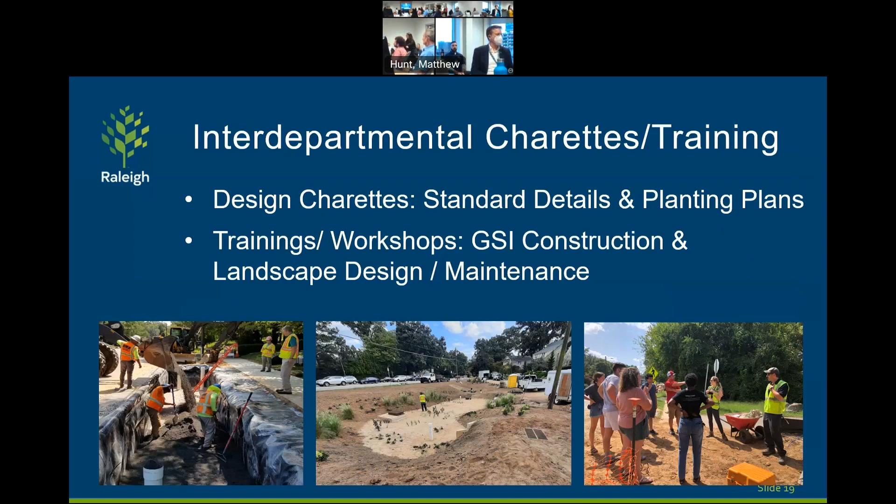No, that's it. There's the Raleigh Rose Garden bioretention rain gardens. So please go out and see that. But do you have any questions about our update?

How many projects has the city implemented for their GSI? I feel like I've recognized a lot of your pictures, so it'd be very interesting to see that map. Yeah, that's a great, so we thought about a GSI tour. And so that citizen science monitoring program is starting to have some locations on a map. Like ballpark off the top of your head? Do we? I would say ballpark. Okay, 20.

Oh, do you know about how many GSI projects, city-led, are there ballpark in the city? It's a slide in last year's presentation. If we count the rainwater rewards. Oh, well, yeah, that's a lot more. Our truly city project, it was 120 or so. Bring that down to more like 20 to 30, I would venture to guess for city-led. That'd be a cool educational map. Yeah. I'd go on that tour. Okay, I'll write this down. There's a potential tour and online tour. Sure.

You're talking about potential tour. I know the Office of Sustainability is kind of creating a map of green roofs and stormwater and other buildings and other things that were sustainable. I'm not sure where that program went, but I know that was something that was being worked on. We're trying to coordinate and include the stormwater stuff in that. I'll have to check with that.